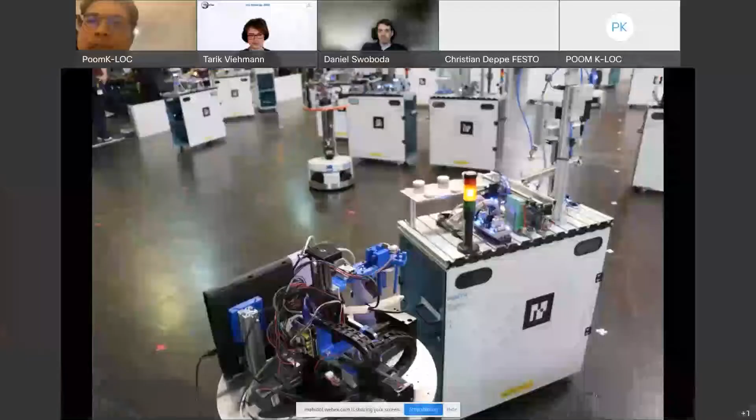My name is Tarik, and I'm part of the technical committee of the league, here to tell you a bit about what we are actually doing. What you can see here are pictures of competitions from previous years. It doesn't look like soccer or anything similar, because we are actually a logistics league. Let's dive into what we want to achieve and what you can gain from joining us.

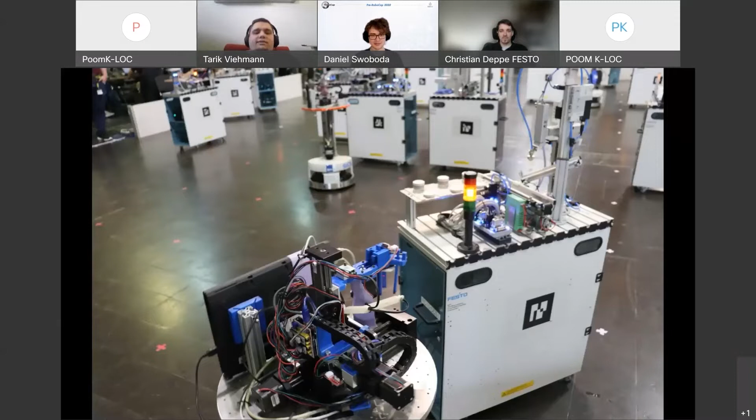The RoboCup Logistics League, or RCLL, has the goal to replicate the challenges of a modern smart factory logistics production plant. It's located in the context of Industry 4.0, where typically customers can configure and order products to their wishes. Instead of mass production, you have highly configurable products for each individual customer. To handle this demand, it's a good idea to deploy robots to operate autonomously and manufacture these products with the help of assembly machines.

This task alone can be complicated, but the customer also has wishes and demands, like delivery time windows you need to respect, and you need to worry about factory resources like raw material and machine availability. To be efficient, one robot typically doesn't suffice, so we are in a multi-agent collaboration scenario where you need to be very effective in order to perform well.

Since it's not just the assembly of one single product at such a plant, but rather a continuous production, you also need to focus on long-term operation that can run with a high level of robustness so that you can keep producing without stalling too much.

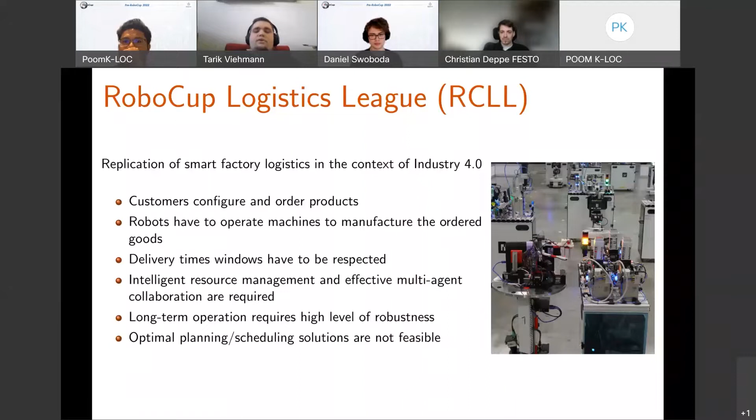We as a league decided to replicate these challenges in a game format. The setting of the RCLL is that you have to operate some static machines that each can do one production step. Each team has 7 machines that they can exclusively use, and then need to assemble those orders that come in over time.

The whole factory setting is constructed to be highly dynamic. You have pseudo-randomized orders. Your field layout is not always the same from game to game, and also machines may schedule a downtime from time to time, so they may not be available at will. That's the rough setting that we are working with.

The actual products that we want to assemble are just cylindrical objects with different color combinations as products. We will see in a bit what we actually mean by that and how you can imagine this to play out.

In order to make a setting where people can compete against each other, we have some gamification elements here. There's a scoring scheme for the assembly of products that rewards you if you build many products and build complex products. You have a 20-minute game window in which you need to perform. On one field, there are always 2 teams competing with 3 robots each against each other to score the most points. And this all is controlled by a semi-autonomous referee box game controller.

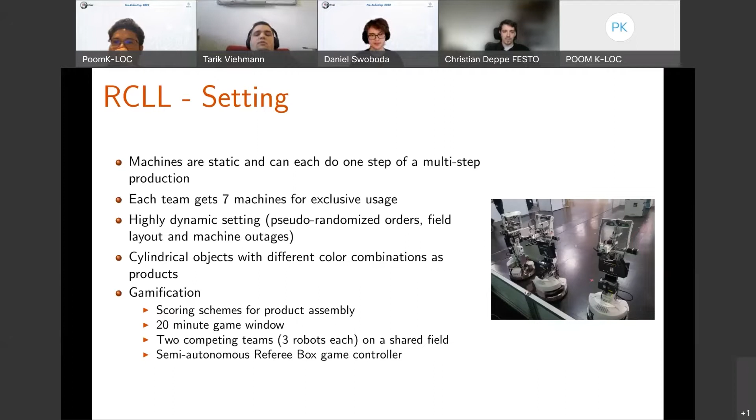Now to the task that we have. As I mentioned, we don't actually assemble some product that we can sell later. Of course, we are a game format in the RoboCup, but instead we build cylindrical objects. Why do we do this? You can imagine this to be like different components that some product can have.

For example, a hamburger. You need to start with some base element, like a bun that you always have, and then you can add different things to the bun in order to customize it to your need. For example, you may want to have some salad dressing added, and that would correspond to some ring color on a product that you want to assemble in the logistics league. Then someone may want to have meat on the burger, so you put meat on the burger as well, according to customer demand, and maybe some more toppings, and then finally you are done and have your final product.

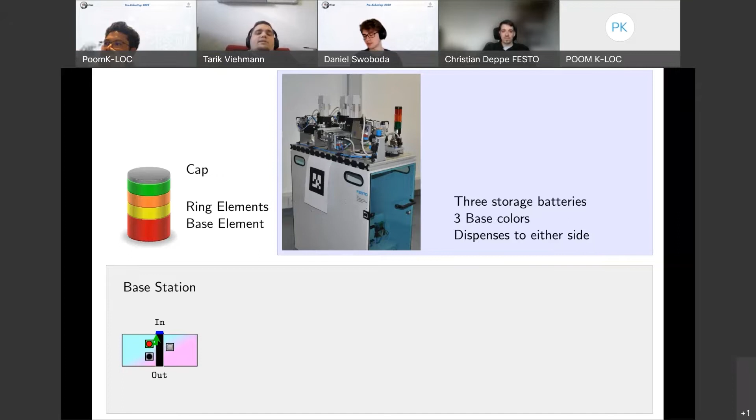Then if you want to refine the product further, for example, add some rings to it, you would need a ring station, which can supply 2 different ring colors for each station. It might not be possible to simply directly mount a ring on an element, but rather you probably need some material in order to actually assemble the ring. This is modeled by having payments that you need to bring to such a station, to a separate slide unit.

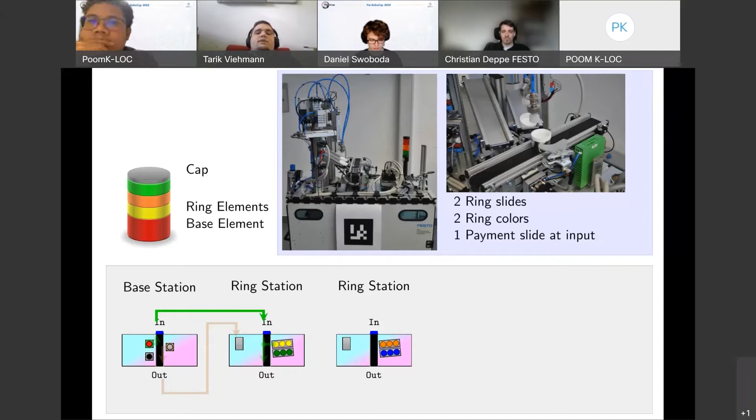The next station that you have at your disposal is the Capstation, and this has two modes basically. It is there to do the last production step, so it adds the cap to a finished product. But in order to do this, you need to first provide the station with a cap.

Similar to the ring station, you first need to provide the material. So what you actually do is the station has a storage unit next to it called a shelf, and there are cap carriers attached to waste products which carry caps. So you feed those into the station in order to let it buffer such a cap. And then once it's buffered, you can use it to mount on the product you actually want it on.

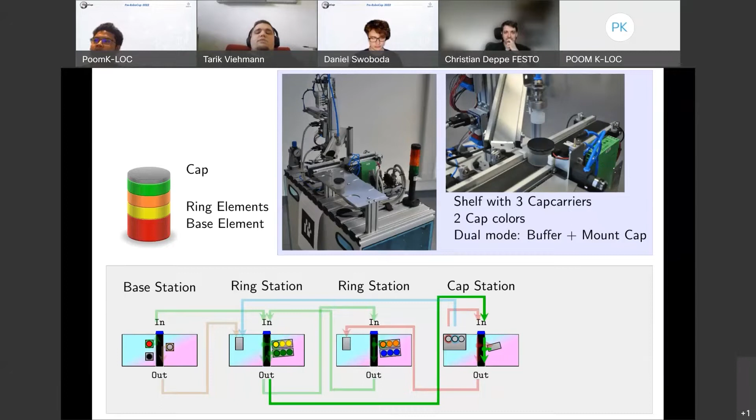And once you have all your payments aligned, you may want to continue producing your product further, so add more rings to it, maybe even more rings, and finally bring it to the cap station and mount the cap that you just buffered on top of it. And then you are almost done.

What you still need to do is actually deliver the product. There is a separate station for that, which only has basically an input side that you bring your products to. And then you can imagine that the delivery to the actual customer would take place there.

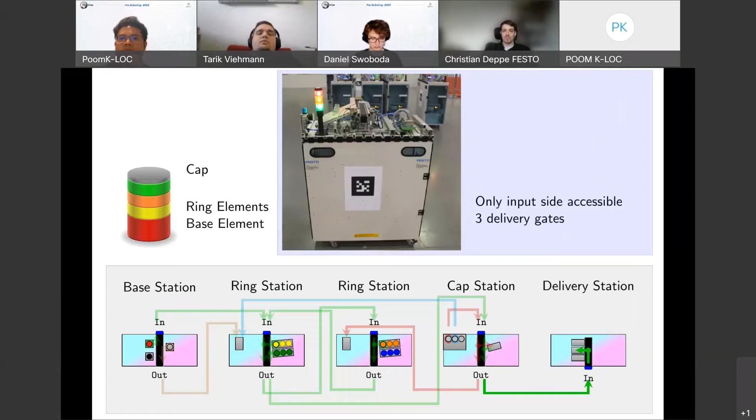So this is the rough production overview that you have in order to assemble a single product. What I didn't show yet is that you also have a storage station at your disposal if you need to store products in the meantime. And this is just for a single product - you can imagine it gets quite complicated if you have more products that you need to produce at once.

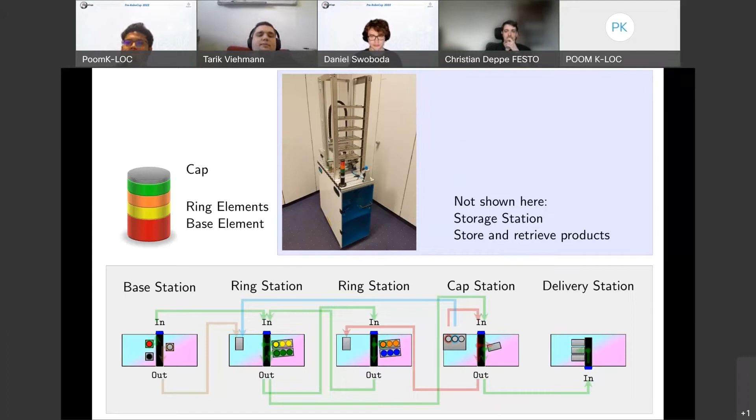And here I quickly want to stop and make space for my colleague Christian Deppe, who wants to tell you a bit about his view on the Logistics League.

Thank you, Tarik. So I hope my slides are coming up right now. Yes, already come up, looks good? Yeah, looks good. Okay, great.

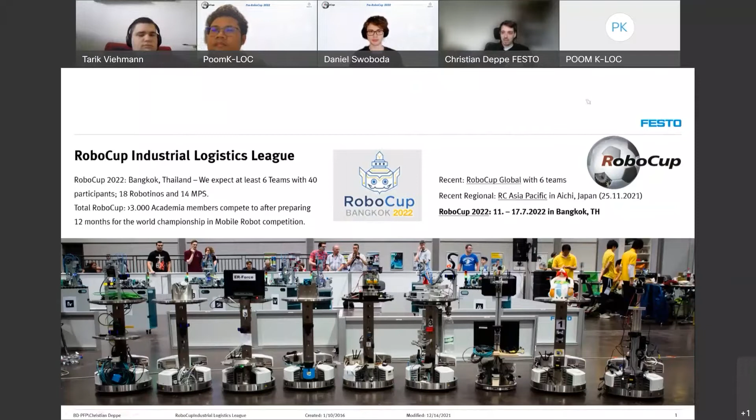And what we like to do with the RoboCup Industrial and the Logistics League is to really go beyond and focus on how production aisles work.

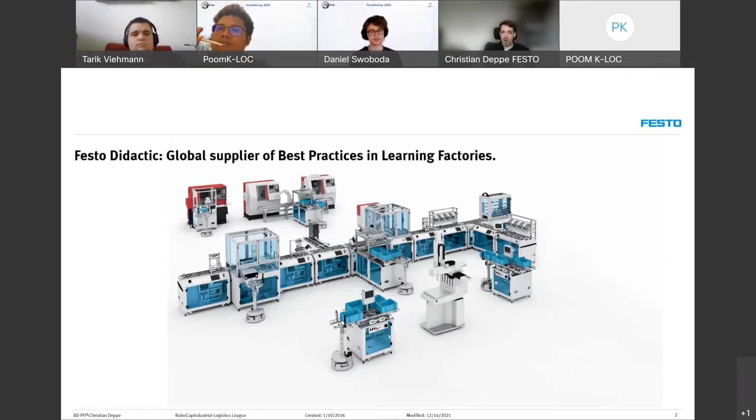So focused machines that provide a specific set of skills - how can we combine them together in a way that improves efficiency, that makes it transparent on how to propagate these skills to the outside world? That is really the strong suit of Logistics League, to take care of the multi-agent systems, the planning problem, and to work and think in this area of expertise.

That's what we are focusing on with the league. As Festo, we are on the one hand supplying you with the infrastructure, all the stations that Tarik told you about as part of the official competition. Also, to get a quicker start, it is possible to have mock-up stations and things like that. And of course, we also provide you with our knowledge and experience surrounding our learning product, the Robotino. So much from our side.

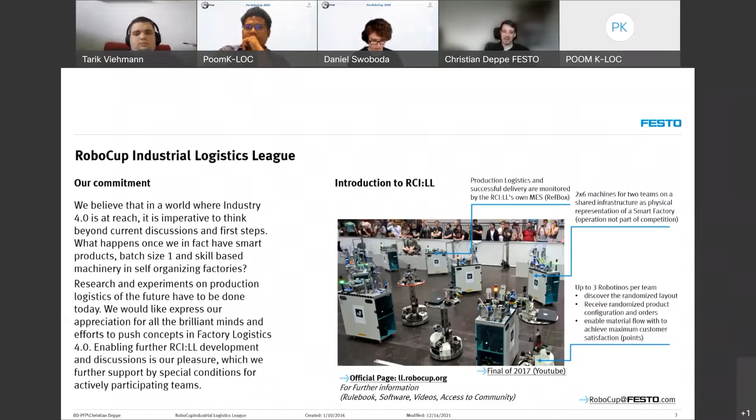I really like the process that we are in and the exchange we're having, and I'm looking forward to welcome even more teams in Thailand. Thank you. Thank you, Christian.

So I will take over again and continue sharing my screen. Maybe a bit of history on the RCLL, since we now heard the take from Festo.

Actually, Festo is the reason why we are here, basically, because in 2009 they started organizing a mini hockey demonstration competition to test out the waters of RoboCup, and they deemed it was too close to soccer, since hockey and soccer are kind of similar on a high level, and it also doesn't really fit any industrial application.

So that idea was discarded, and instead they transformed the hockey problem into a logistic task problem. You can see in the top right the picture of what they came up with in 2010 and 2011, which was the idea to use the hockey setup, but actually simulate how it would be to produce something. Then for a few years, there were competitions using that setup.

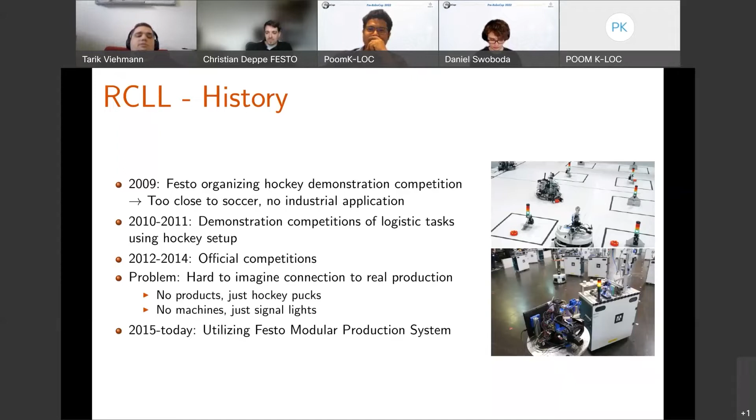But quickly it was discovered that the main problem here is that it's really hard to imagine the connection to a real production plant if you just have hockey pucks put into different marked areas on the floor. So Festo thought, okay, let's improve this. And the league as a whole agreed to move to a more complex setup, which involved these Festo modular production systems that we are using up to today. That's really where we came from.

So what can you expect when you are working in the league? First of all, when it comes to the robots themselves, we use the Festo Robotino as a common platform, which is very comfortable for us, because then we have a fair baseline, as all the moving constraints across the teams are very equal. However, starting from this year, we will also allow similar platforms to be acceptable in a limited scope, as I will tell you about later on.

Starting off with this Robotino platform that you can see on the top right, you are pretty free to actually extend it to your needs. You can add additional sensors that allow you to realize the ideas that you have for the league, and you can also design your own actuator system to actually grip the products that you need. And actually the solutions that different teams come up with are very creative and also very unique for each team, I would say.

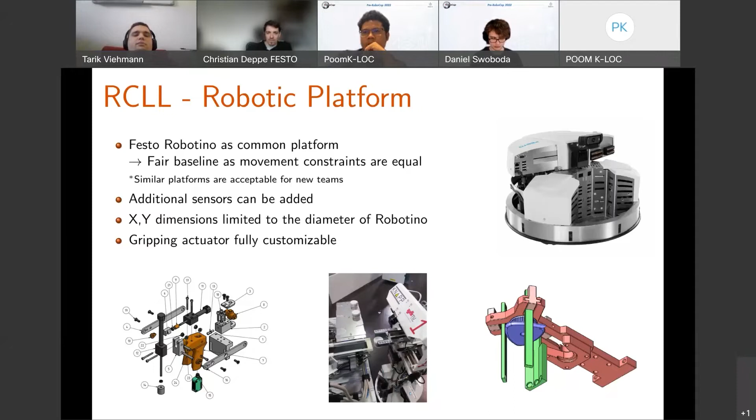So if you have a robotic platform at hand, that's great. But now you may ask yourself, what can I actually do in the league, and where to start and where to end? We provide you with a small road to success, which basically should outline the steps that you can go through in the league.

So of course, the first thing is you need the hardware - you need some Robotinos or similar things that allow you to move around. You need to extend it to your needs, add an actuator, add sensors, so that you can actually start performing. And hardware, of course, is not really enough. You typically need to control this hardware as well. You need to learn how to navigate in the world, and you need to coordinate the navigation.

Eventually, you need to avoid obstacles as other robots of other teams may be on the field. And once you have this, you should also think about how to actually reach the machines standing around. So you need to detect the machines properly and align consistently in front of them with decent precision so you can actually interact with the machine.

And then if you stand in front of a machine, that's still not enough. You probably would also like to interact with it by having your gripper system be able to take products from machines and bring them to machines. This is typically within very tight margins, so you need to be quite precise when you provide such a system.

And then you think you are good. No, of course you are not good yet, because you still need some high-level reasoning to actually overcome the task, right? So the whole planning logistics involved here, the whole dynamic setup that you need to conquer. One basic step would be to first learn how to interact with the referee box system, which supervises the whole game and also is the gateway to interact with machines.

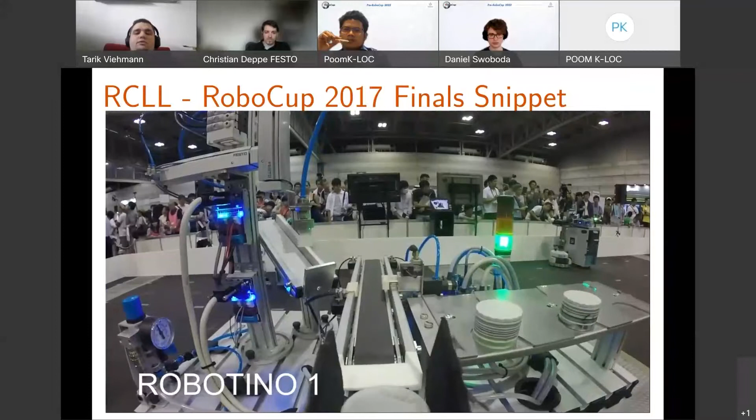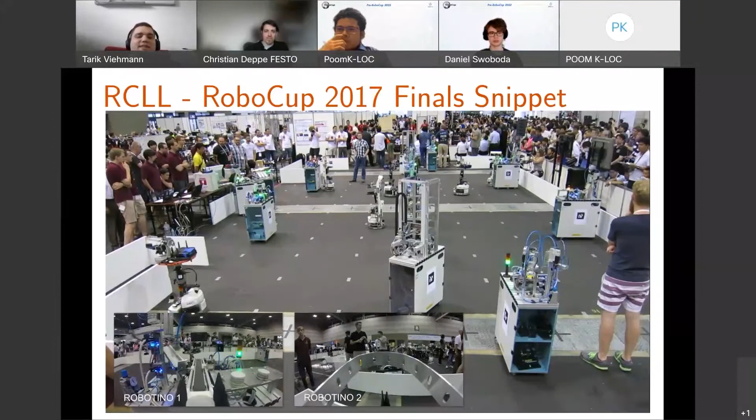This small clip is essentially from a final of 2017. It was a very tense situation here, where of course both teams wanted to perform to their limits. And I would say, judging by how past RoboCups are, this was probably a very fun and exhausting experience. I wasn't personally there yet in 2017, as I joined in 2018.

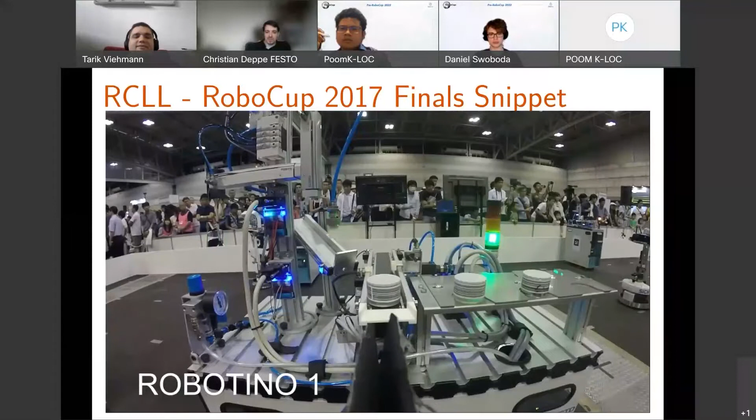But yeah, this is a rough idea of how it looks like. You have robots driving around while other robots very much concentrate on bringing products to machines. And with that, I'm done with my first talk.

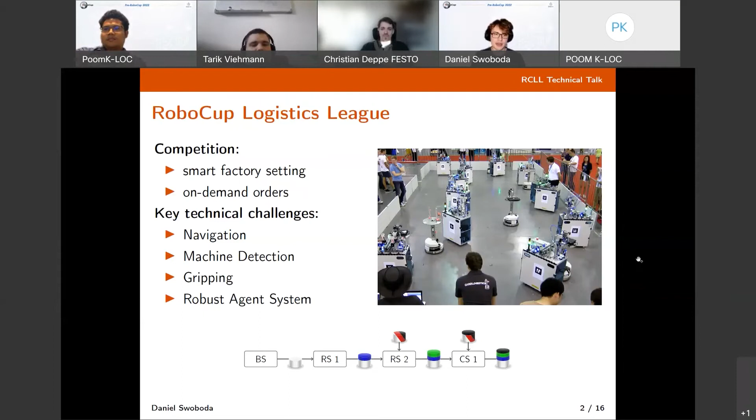As mentioned before, we are working in a smart factory setting with on-demand orders, and that imposes some very prominent technical challenges: navigation of the robots in the field, machine detection, gripping, and finally, to bring it all together, a robust agent system.

I'll go over them in that exact order, because that's also probably the order you're likely to face when starting work in the league. So let's start with navigation.

Our navigation needs to deal with two kinds of obstacles: dynamic and static. Since you're not the only team on the field in the main track, you have to deal with robots from other teams, which are moving obstacles, and also with machines placed on the field, which might create narrow passages and other difficult situations to navigate. You can't rely on pre-computing anything, because whenever we start a new game, a new field layout is generated—each time you face a new environment. So hard-coding anything doesn't work.

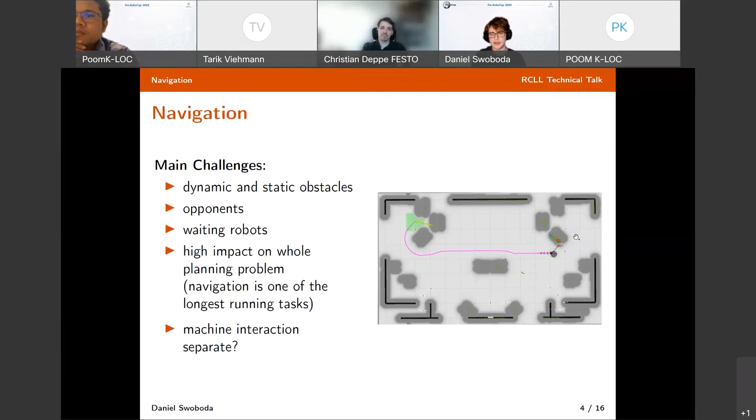Another issue is that your own robots might cross your paths, and you need to consider that they might be additional obstacles in tight passages—for example, if they need to access a machine in that position. And finally, machine interaction is a different task from navigation itself, so even if you consider all these things in your navigation, you might block yourself while performing actions with the machines. How could you solve that?

The most common ways to do this are either single-agent pathfinding, where each agent plans for itself separately, or normal pathfinding with all the agents considered together. Single-agent planning requires no communication between agents, which is nice, and it allows you to easily deal with faulty robots—if one robot fails, the others are still independent and working as intended. But it never gives you an optimal solution, because you're not using all the information available to create optimal combined paths for all the robots.

It also gives you issues with narrow spaces and passages. For example, if two robots want to pass through a narrow part of the field from two different sides, they might block each other, which is, of course, also problematic.

Eventually you will need to add some form of coordination to avoid these scenarios from occurring and to get as good a performance as possible. That will eventually lead you to try to get some form of multi-agent pathfinding going.

Here you would have common planning for all agents. It does not require any additional coordination because the coordination is part of that. It can be potentially optimal. Of course, getting optimal solutions is computationally intensive, so probably not, but technically it's possible. And it's easier to deal with those resource limitations because you're considering all the different movements of all the robots.

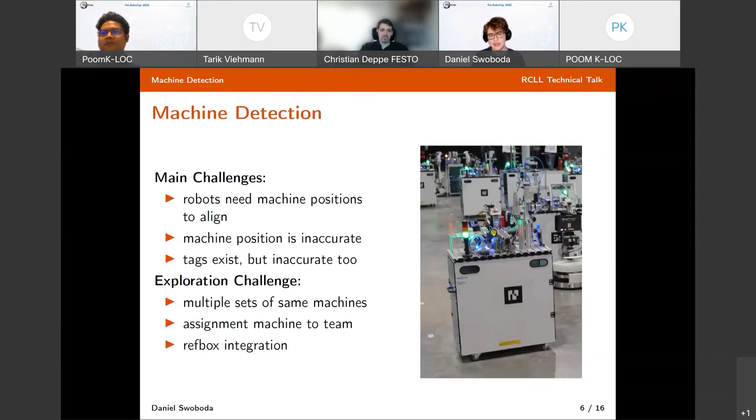Also, you have multiple sets of the same machines. And if you face the exploration challenge, you need to figure out how to solve these issues, because you don't necessarily know which machine belongs to which team, unless, for example, you read the tags or communicate with the ref box in some sense.

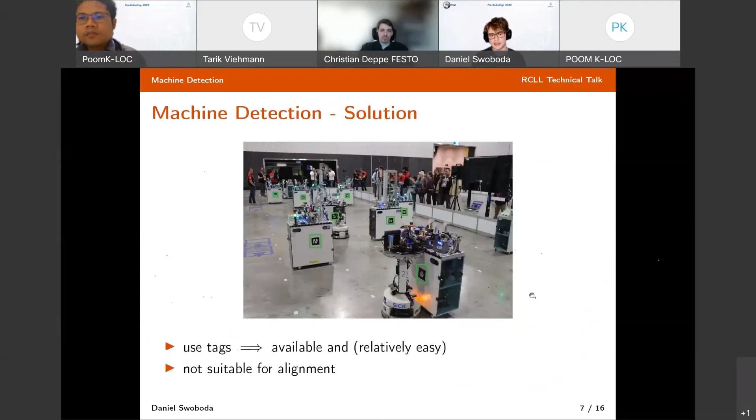But the common solutions for that would be to either use the tags, as seen here, which are available and relatively easy to read but not suitable for alignment, or switch to a more advanced solution, something we would actually prefer as a league, using an object detection model like YOLO and Darknet for more accurate positioning and detection.

But the machines might be hard to differentiate because they really just differ in the setup placed on top, and you might get false positives from your machine learning model, because from different angles they might look very similar. And of course you can never get as much training material as you need to cover all the angles and all the different backgrounds that you might have.

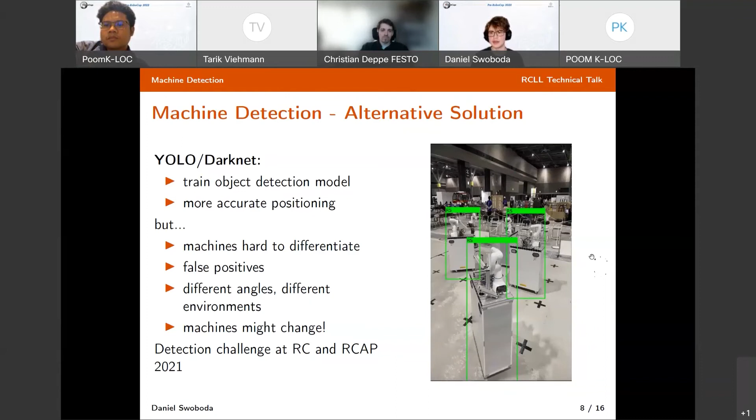But if you manage to detect the machines and navigate on the field, now you need to actually interact with them. So what you need is a gripper, and this gripper needs a system for alignment and object detection.

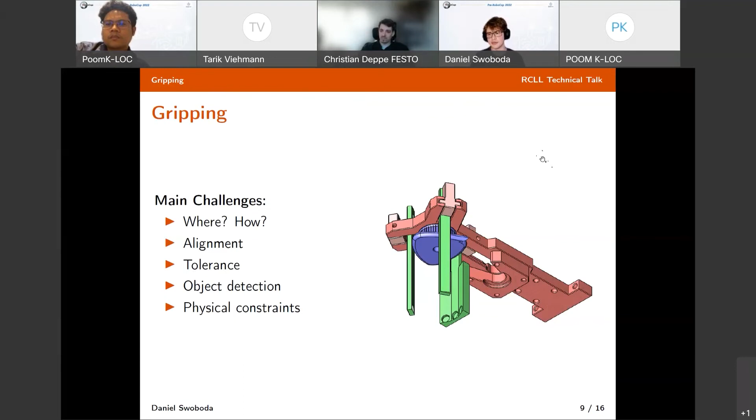So the main challenges when designing a gripper are where and how to grip, how to deal with the alignment, how to deal with the tolerances that you face, how to detect the objects you want to grip, and of course the physical constraints, because you can't just build an arbitrary size gripper—you have to stay within the constraints of the robot size and within the rules. And here, as we see in the league, there are quite a lot of different creative solutions for how to grip.

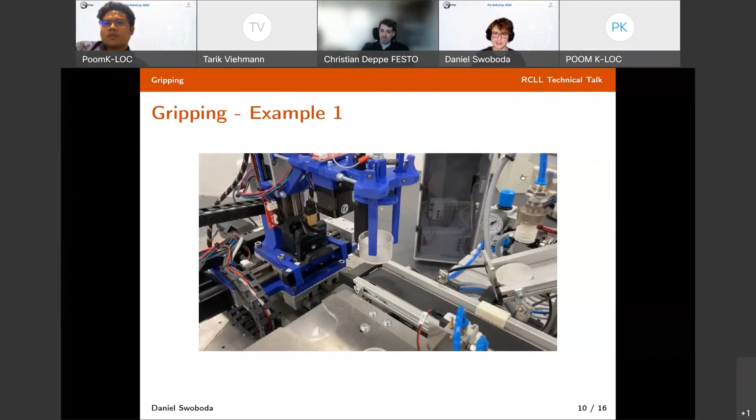So I want to give you some examples of how this issue has been solved in the past. Here is the gripper that the team Carologistics, which I'm a part of, uses. It has three bars that are used to grip the cylinder from all sides.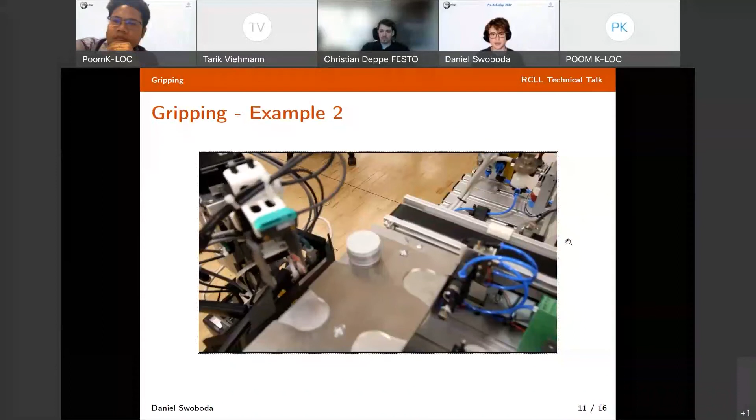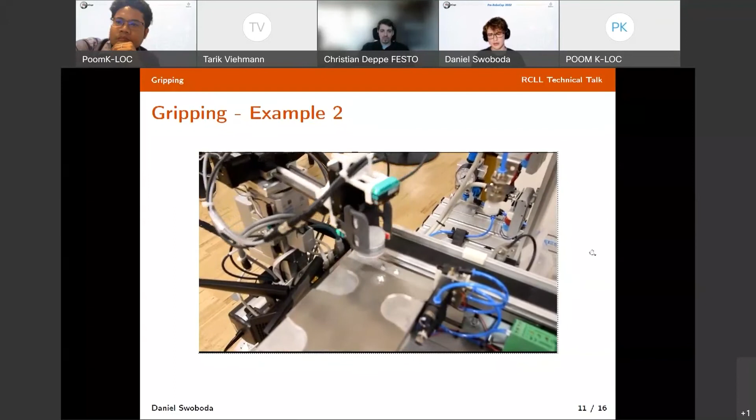Next we have the gripper from Team Grips, which just grips it from two sides, and has a sensor placed at the top, which is used to scan the environment in order to place it. And you can see it does work.

Then the last example is from Team Solidus from Sweden. They're using a sort of cone and another stick to hold it in place. Very different solutions for the same task, but all of them work rather well.

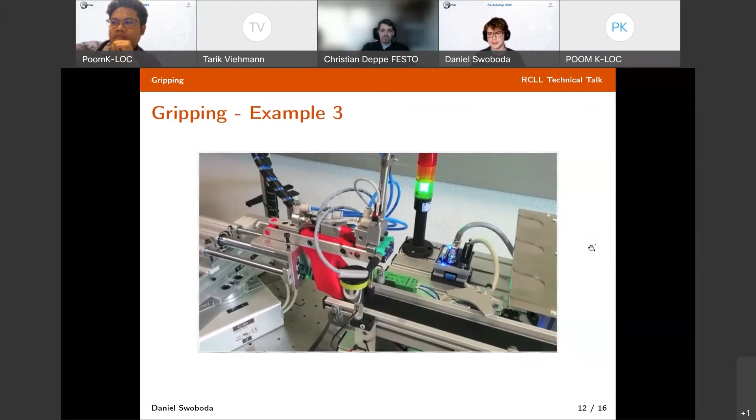So you can get really creative there, especially if you're a mechanical engineering student. I think you can get lots of your ideas in. But building the gripper is only one part of the gripping problem, because the other part is, of course, the

object detection, the alignment. And two potential solutions for that are ICP, iterative closest point. So you could, for example, take some samples from the conveyor belt with a 3D camera and use ICP to compare a point cloud image generated during the operation, and just use ICP to detect a match, which is slow but works.

Or you do something more advanced like visual servoing with a CV model, where you train a neural network to detect the workpieces. With modern neural networks, you can get real-time position feedback, and you can even integrate it into a feedback loop like in visual servoing and position yourself very accurately and smoothly. But that requires, of course, a lot of training data to identify the workpieces.

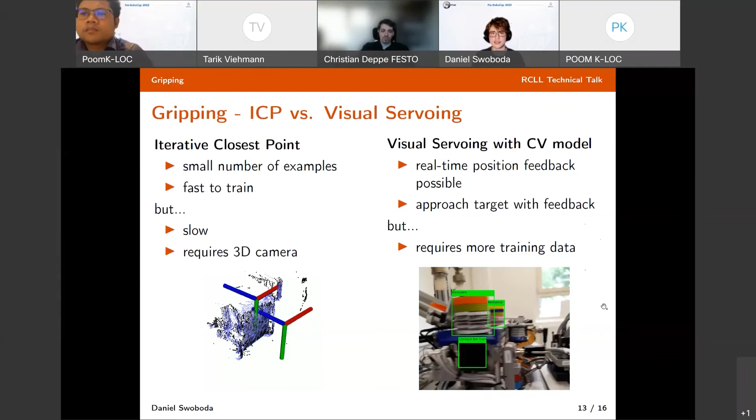Then finally, once you have all these different technical challenges put together and solved, then you can build your agent system, which brings it all together and actually makes your robot a smart and reliable robot. But this also comes with a lot of challenges.

For example, you need to solve communication, you need to solve skills, which is the term we usually use for the low-level interactions. You need to have it reliable and robust, and you need to be able to follow long-term objectives, because producing one product requires so many steps that you have to keep track of them, and you may have to adapt based on what your robots do and don't do.

There have been different approaches that we've seen in the league, for example centralized and decentralized approaches, goal reasoning, scheduling, planning, and so on. Quite a lot of variety, so it doesn't make a lot of sense to go over the examples there. Instead, let's go into the challenges in a little more detail, and start with communication.

Communication is required to coordinate the robots, because if you have three robots on the field, you can't simply not do any communication at all. You need to make sure they're not blocking each other, that they're working cooperatively, and you need that, because otherwise you won't be able to score a lot of points in the game. But the problem, as I mentioned before, is unreliable networking situations, so you need to be able to deal with that as well.